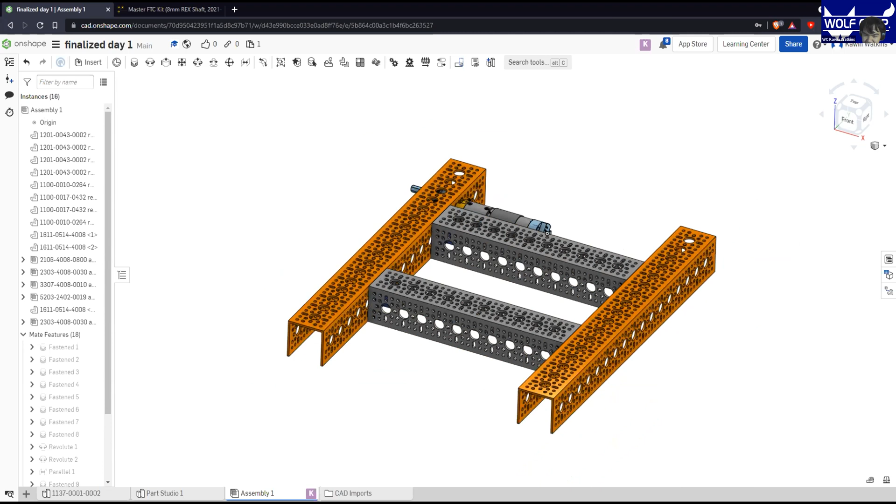All right, so now if you go to your document, or if you copy it over from here, you should see a chassis with one motor installed on it. And if you rotate your view, you should be able to see that it has pretty much all of the gears installed on it. And if you try to rotate one of them, it'll just rotate that one, and the other one will not rotate.

So the first thing we're going to do today is fix that. Just as before, if you go to your left, there's going to be a menu where you'll see every part that you have in your assembly, as well as every mate feature that you have. First, in the menu on top where you usually get your mates from, go to the very right of those mates, and you should see a menu with a lot of gear symbols. Select the one on the left, and if you hover over it, it should say gear relation. The icon looks like two gears meshing into each other.

Click on that, and then instead of selecting parts like you would normally do with mates, you want to actually select the mates themselves. Specifically, you want to select Revolute mates, which is why we did our Revolute mates. And for copying the file, let me see if—

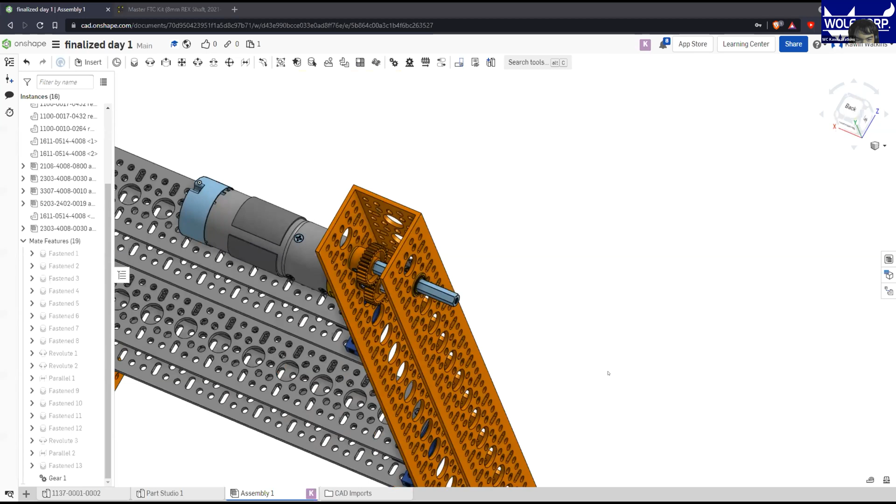Then after that, if you click and drag, they should mesh with each other. After that, all you have to do is click on the check mark, and your gears should be meshed and rotate quite well. So once you have your gear mate selected, then you want to go to Insert.

And then go to your Assemblies tab and select the second part, which is a large blue part that begins with 1310. Make sure it's 1310 and not like 1309, because it's kind of easy to confuse them.

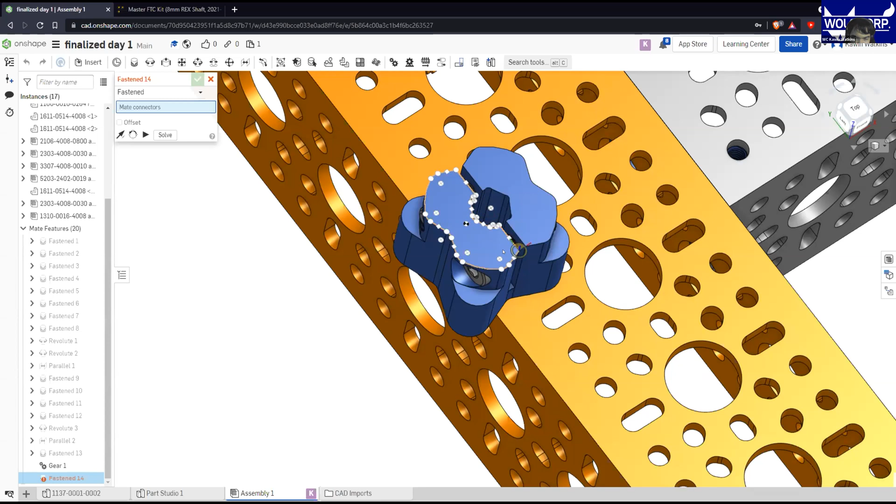So after you have that, check mark, and now you want to do a Fastened Mate. For that, you want to hover your mouse—first zoom in to your part, then hover over the top surface of this. It should be the one that's kind of thinner, and it only has one hole in it. If you hover over one of the surfaces, you should see there are a lot of mate connectors, but one is different from the others, and that's the one located in the center of the hole. Move your mouse until the icon shown is actually over that hole, and then click it.

For your second connector on the mate, just click the top of your bearing. On your bearing, there should be a lot of circles. Just select the one that's a bit on the edge, pretty much on the top of the bearing. Once you have that, if you notice it's not fitting correctly around the axle, you can just rotate it, but regardless, you can check mark that. Now if it's the wrong way, again you can just use your flip tool, and that should be all good.

And now when you click and drag on your hub, you should see that it actually rotates the axle and the gears and the motor and pretty much everything that goes along with it.

Then you want to insert, and...

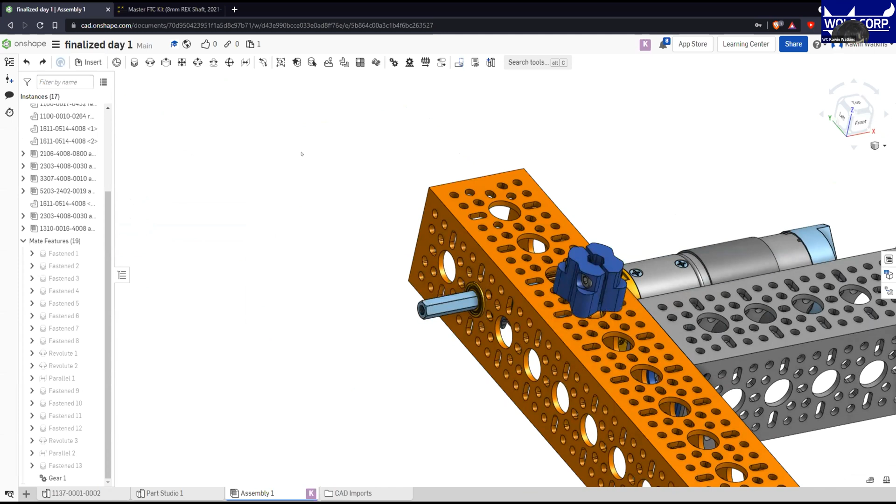So first, once you have your Fastened Mate created, on the top surface of this hub, the blue part, which the top side should have only one hole in it, hover your mouse over the very top surface of that and move it so that the icon, which is the yellow circle with the 3 colored lines sticking out of it, is over the hole that's in the middle of the hub.

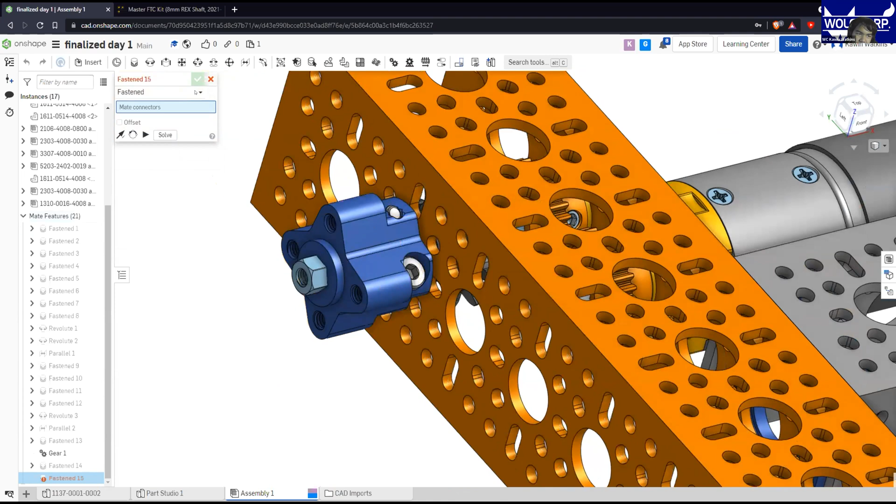Then just click on that, and then for your second connector, just click on the top of the bearing, the top being the side that's facing towards the outside. And then you can rotate that if you want and solve it. Close this if there's still a window, and click and drag to see that everything rotates correctly.

And now after that, we are going to insert another part. You're going to have to do a bit of scrolling down for this, but it's going to be the large wheel that ends in 0096. And there should be actually 2 of them.

One is going to be blue and one is going to be gray. It should be below the sprockets. So just select the gray one, just because like blue wheels would look kind of weird. And then hit the check mark again.

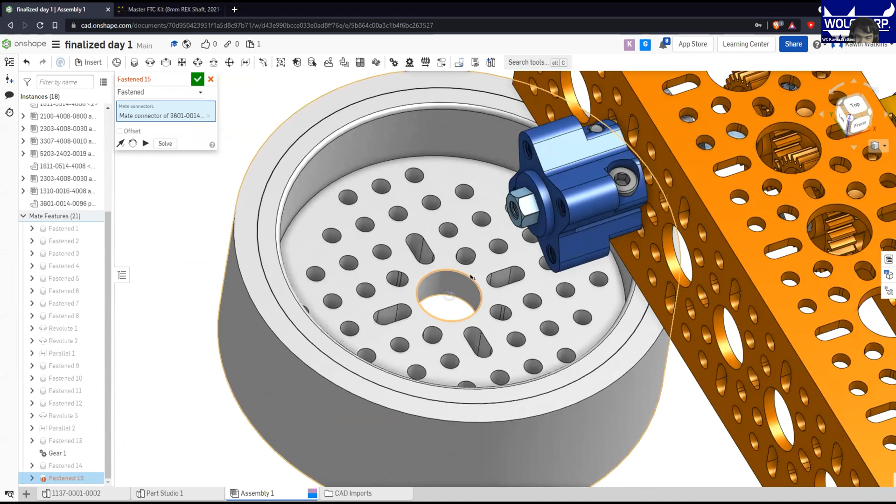So now what you're going to want to do is do a Fastened Mate and go to the top of the wheel, specifically this like kind of surface with all the holes in it. You want to select the large one in the middle and select the top edge of that, and then click. And then for your hub, where you attach it to, first you might want to rotate your view so you don't accidentally click the wheel.

For this, you want to actually see that there's kind of 2 sections that would count as this surface. There's like the flat surface with the 4 holes, and there's also this little part that sticks out. So what you want to do is select the edge where they both meet, which would be kind of like the bottom of the part that sticks out, basically.

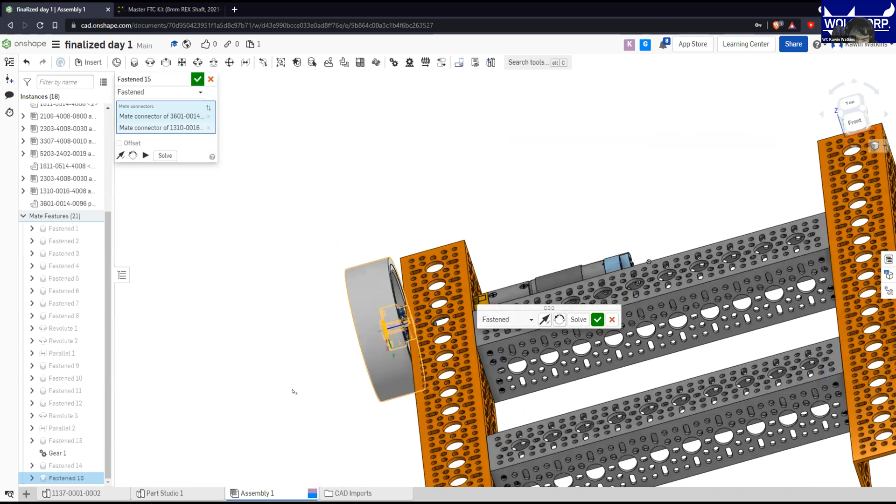And then once you have that, just click and your wheel should be all good. Once you have that, you can click and drag on it to rotate it.

Another thing that we can do is called animate, where we can basically have it so that we can move our wheels around. So to do that, go to our menu on the left, and it has pretty much all of the mates in there. Just click on Revolute 1. Don't double click, just click it so that it highlights in blue. Then right click on it, and then you'll see that there's a lot of options you can do.

What you want to do is go close to the bottom, and there should be a button called Animate. Once you click on that, there's going to be a box that shows up, and the only thing that really matters are the two buttons on the bottom, which are play and stop. So if you press play, then everything should go in order. Your gears should rotate as well as your wheel.

And there's also some more options. Start value and end value are pretty self-explanatory. Steps just controls the speed, and playback type you can set it to like loop or play only once.

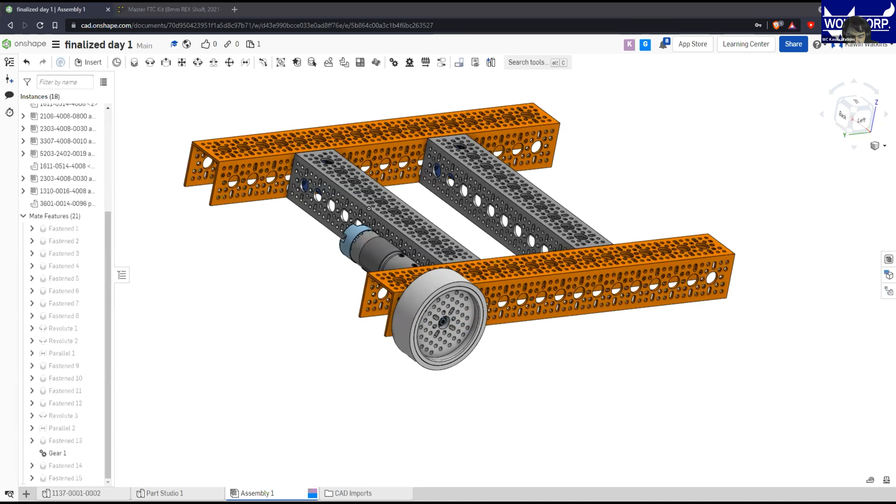All right, so to attach the blue thing, I assume you mean the hub.

Basically what you want to do is do a Fastened Mate. So if you don't remember from yesterday, that's on the top menu, and it looks like a cylinder with like two parts that are coming together. If you hover over it, it should say fastened.

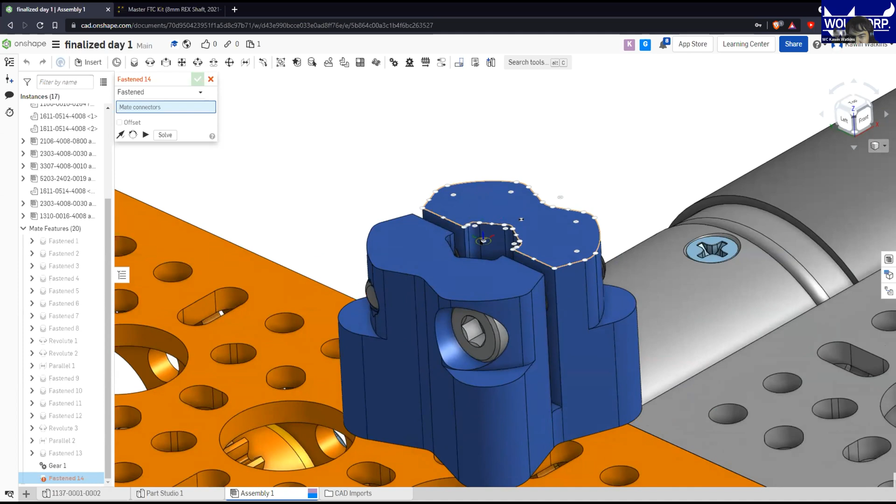So once you get that, you will hover on the top surface of the hub, and there should be a lot of like white dots, which are basically the points where you can connect it. But the one that you want to click on is going to be located on the top of the hole that's in there. So it should be the one that's like on the far side of that surface.

And then once you have that, the second connector that you want is going to be on top of the bearing. Basically, what you want to do is just hover over the surface of the bearing and click.

And if you want the hex to line up, even though it doesn't really matter, just click this circle key if you want to. And then just press the check mark. Once you have that, it should be attached on. Is that good?

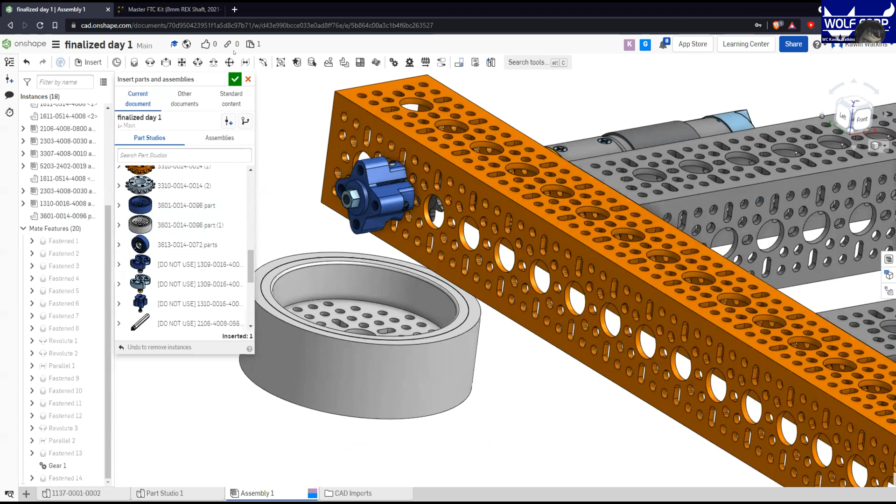And then a quick recap for insert: just go to Part Studios, scroll down, there should be 2 large wheels, one blue, one gray, and just move the gray one into your assembly. Then check mark, do another fastened, and make it, attach it to the hole in the center, and attach it onto the hub where the part that sticks out meets the surface that has the holes on it. Once you have that, you can press the check mark and your wheel should be ready.

So if anyone else has questions, then don't hesitate to send a message and I can go over it.

Done? I'll wait like 1 more minute and then I'll hand it off to you. All right, no problem.

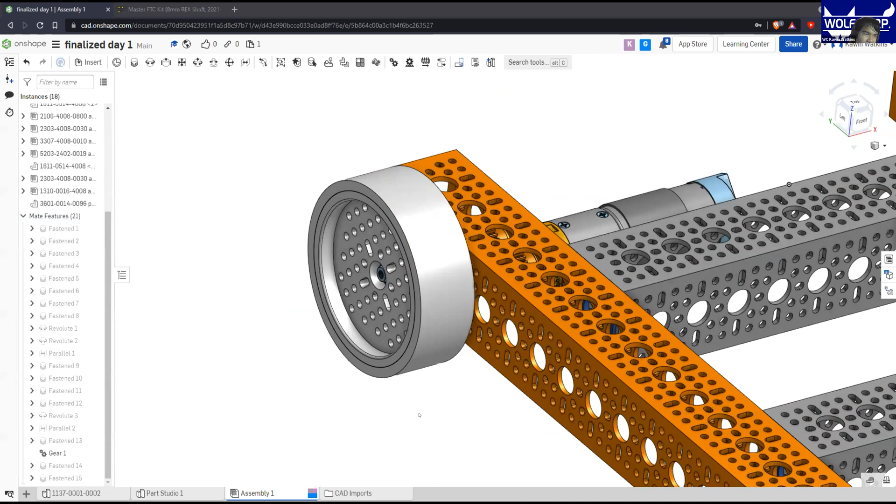My chassis is fastened to the origin, but if you click and drag and it's moving a lot, one thing you can do is right click on a part, and in this menu there should be a button called Fix, and that makes it so your part isn't able to move at all.

But it doesn't really matter where the origin is, just that your chassis is pretty much fixed. Actually, this is additional information, but mates, you can also set mates to be on the origin. It's kind of hard to do here because it's already attached, but you can basically use the origin for mates as well.

So if we don't have any more questions, then I will hand it off to Kevin, who will show you how to make the middle wheel.

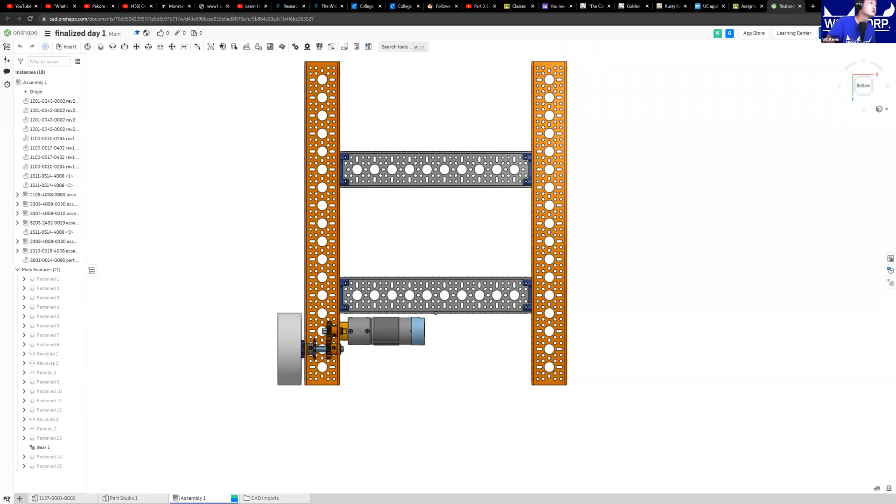Okay, so here is where we left off from Kawin, right? We have our bottom left wheel here attached to our motor, and it spins it correctly and everything. Next up, we're gonna make the second wheel that's right around the middle of the robot.

First off, I think we want to insert two more bearings for us to revolute. So go down into your part studio, and then the bearing should be 1611-0514-4008. We're gonna grab 2 of those. And don't forget to press check mark afterwards so you save them in.

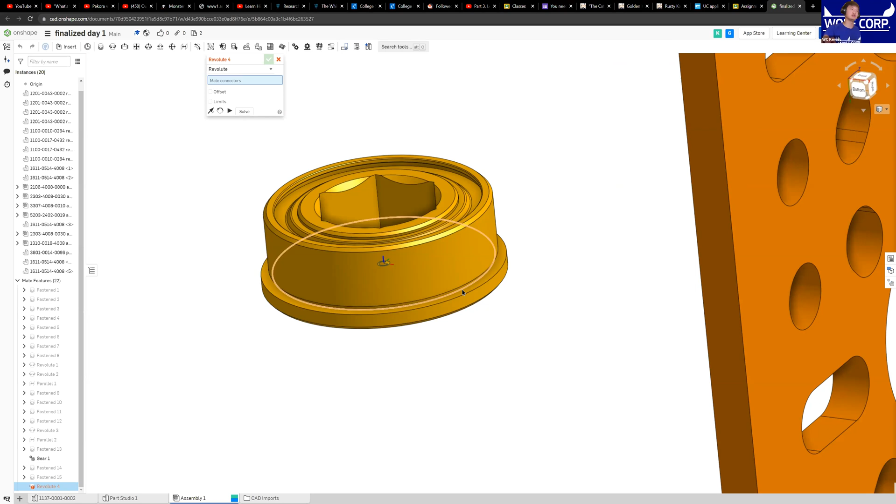Now we're going to use our revolute mates again so we can spin them in our channels. For our first bearing, we're going to click on the underside of the protrusion on top. So click on there.

The hole we are going to use is 2 up, so the third one from the channel here, this one. I'm going to zoom in and click on the inside of the channel here. We want the head of the bearing to be on the inside of the channel, so flip that. Then press check mark. Your bearing's head, the part that's thicker than the rest, should be on the inside of the channel, like that. It's counting 2 holes up, and then it's on the third hole there.

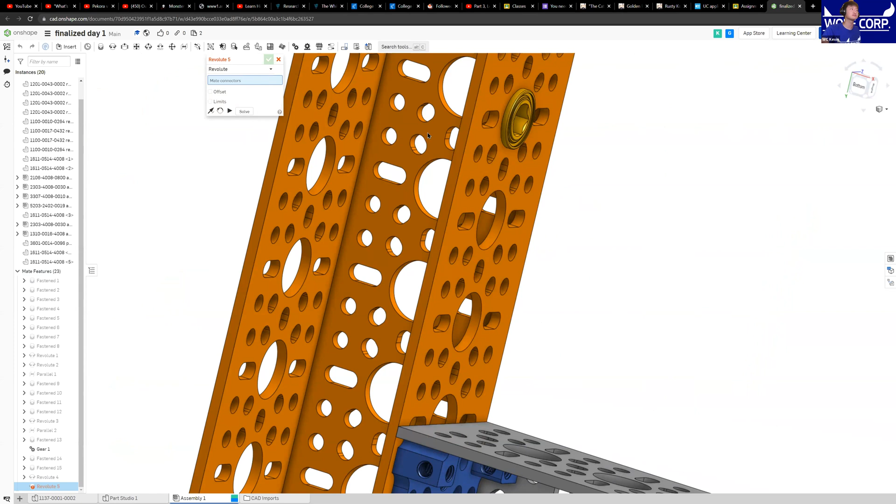Moving on, we're gonna do the same thing for our other bearing, just on the other side of the channel. Click on that underside edge of the bearing, then go around and click on the inside of the hole of the channel. Make sure that your head is on the inside. And then there you go - that's what our two bearings should look like.

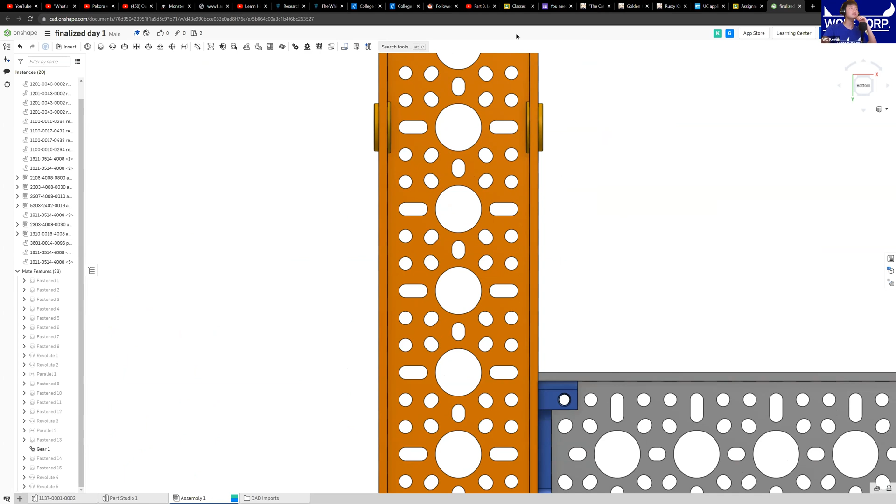Any questions so far? All right, we'll give it another minute for people to finish attaching those two.

There's going to be some slight differences, especially in the types of stuff that's on the axle. So it's mostly the same concepts, just kind of different parts.

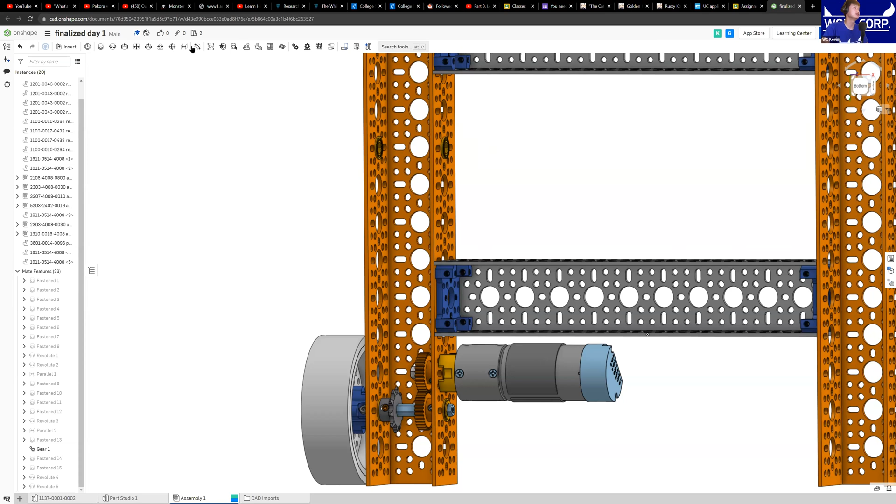All right, I'm going to move on now. Next step, we're going to line these two revolute mates up so that they spin together with a parallel mate. At the top of the toolbar, in the first section where all your mates are, it's the farthest to the right, and this is the parallel mate. It's like two rectangles with an arrow pointing at both of them. If you hover over it, it says parallel mate. So I'm going to click on that.

Then we're going to zoom in on one of the bearings and click on one of the surface areas, like the hexagonal shape on the inside of the bearing. Just any one of these surface areas. And then click on that.

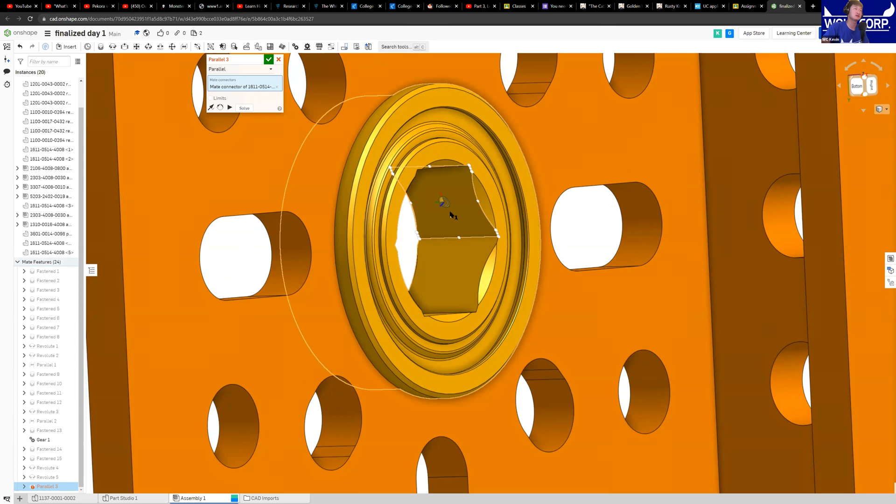And then go to the other bearing and just click on another surface area as well. Once that happens, once that happens, when you press the check mark, the two should just kind of spin together.

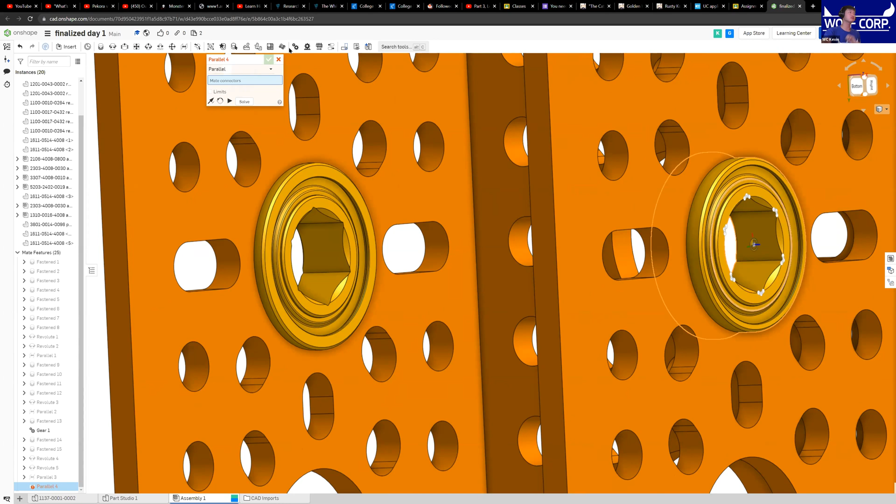Any questions on this one? Okay, if there's no questions, let's just move on then.

Next up, we're going to be inserting the actual axle now. So go back to your insert menu, and then it's going to be an assembly here. I believe it's this one, the bluish axle, ending in 0800. So this blue axle right here.

Just going to put one in there and then check mark. Okay, and then for this one, we're going to use a Fasten Mate to stick it onto one of our bearings here.

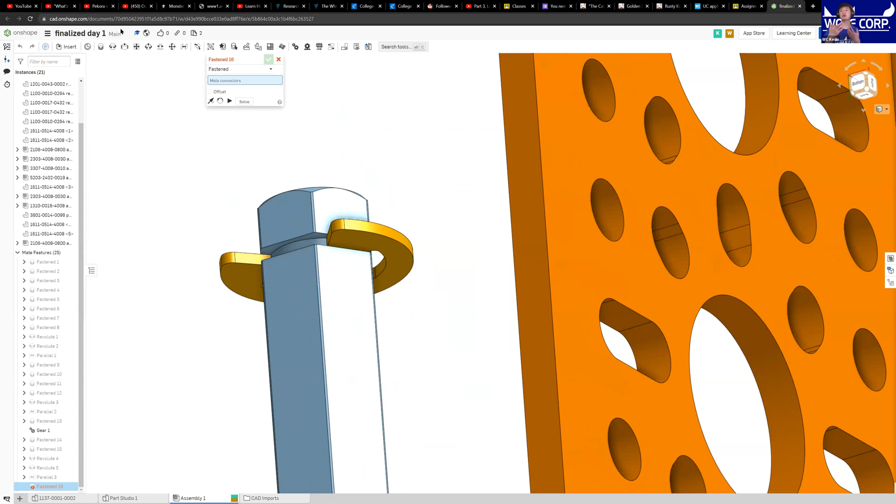So the important thing here is to make sure that the center indicator is well centered on your axle, so that the program knows how to spin it correctly and in center. To do this, I'm just going to click on the underside of this yellow thing at the top, and then click on the edge. So it's going to be this edge on the underside of the axle. And just make sure that your center is centered.

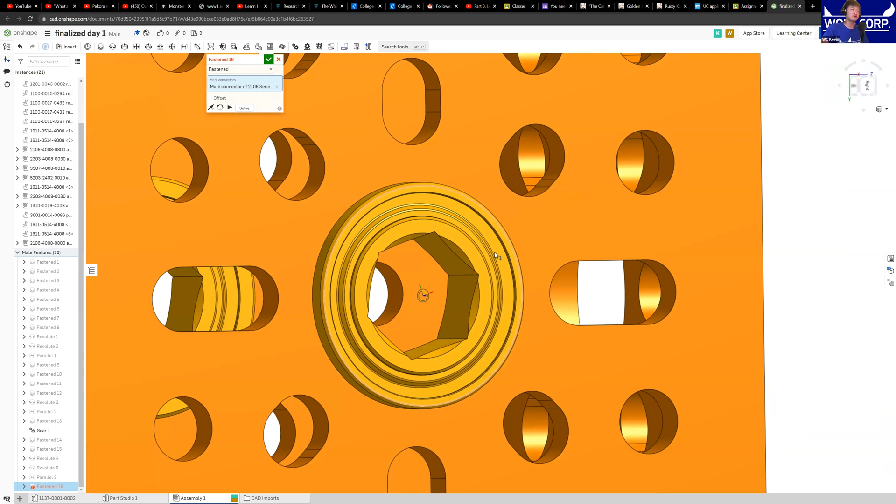And now I'm going to go back to this bearing, the bearing on the inside of the robot. And then I'm just going to click on one of these circles, the outer edge of the bearing-ish, and just make sure that your center is centered again. And then make sure that your axle is pointing outwards, right?

Kaboom. There you go. And then if you try to spin it, they should all just kind of spin together. Your two bearings and your axles should spin together. Questions so far? Okay, I guess no one has a question up till this point, so we can just keep going.

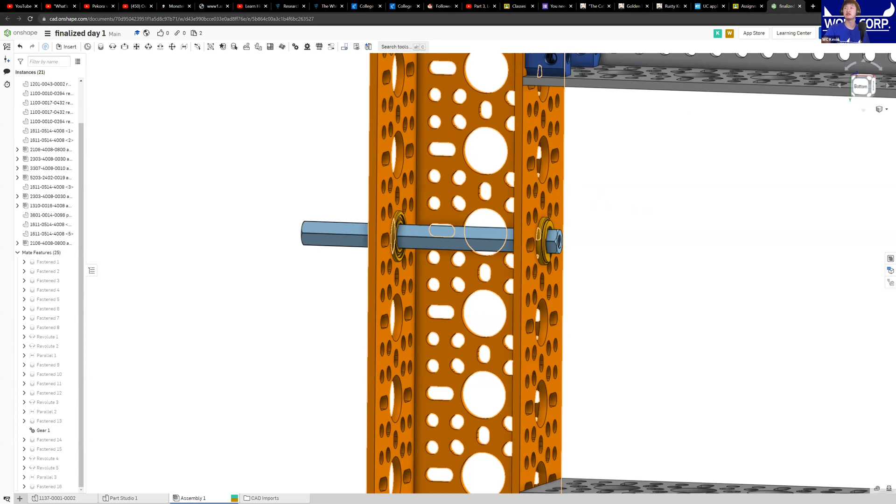We're making good progress. Next up, we're going to start inserting all of the gears and sprockets on the inside of this channel and on this axle. So first off, we're going to insert a big sprocket here. The part number should be 3310-0014, and 0014.

I didn't center it. So do you want me to show you it again, or? Okay. So for the Fasten Mate, right? For the axle. So, okay.

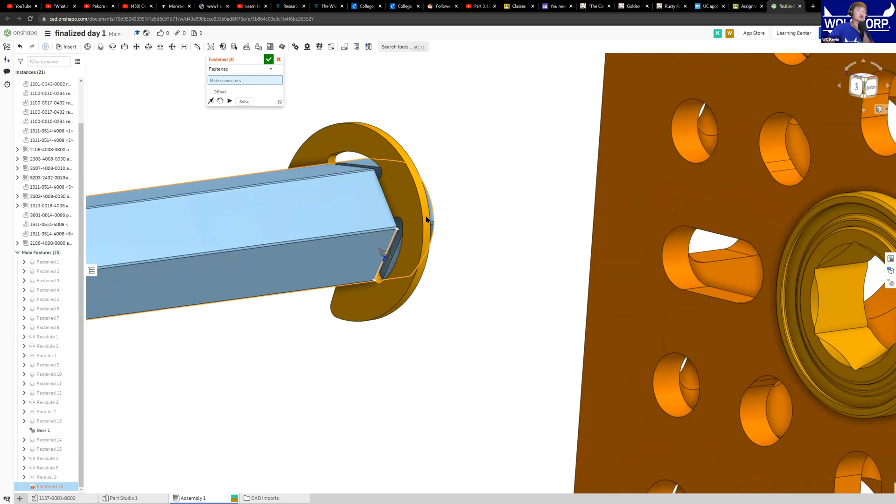Click on your Fasten Mate, and then on the underside, so the surface area of this yellow part that's pointing with the longer side of this axle, right? Going to zoom in on the underside of this, and then click on the edge of this. Just click on the edge. Don't click on the surface area, but click on the edge.

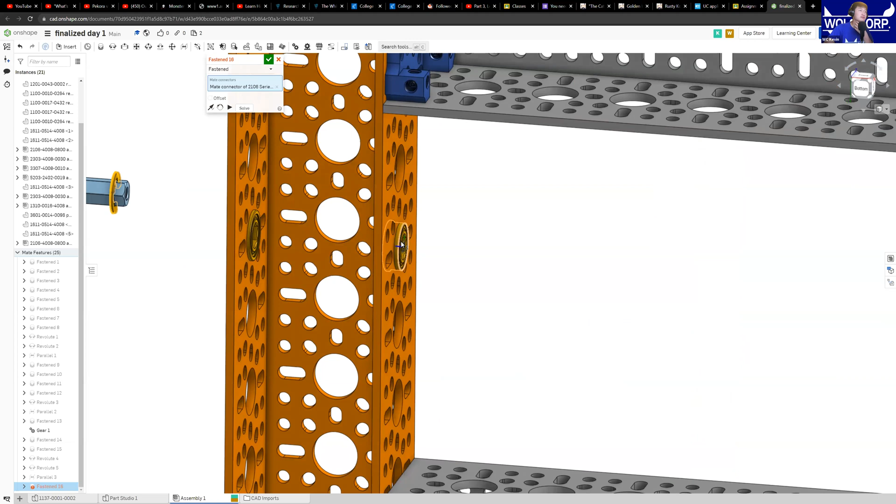And then once you've clicked on the edge, go around to the bearing on the inside of the robot. So this one right here. Then zoom in a little and just click. You can really click on any of the circles, but I think the outside one is the safest. So as long as your center indicator here points to the center of this bearing, then it should be good.

And then you can just make sure that at this step, the long side of your axle is pointing outwards. And then once you have that, just check mark. Okay, I hope that answered your question.

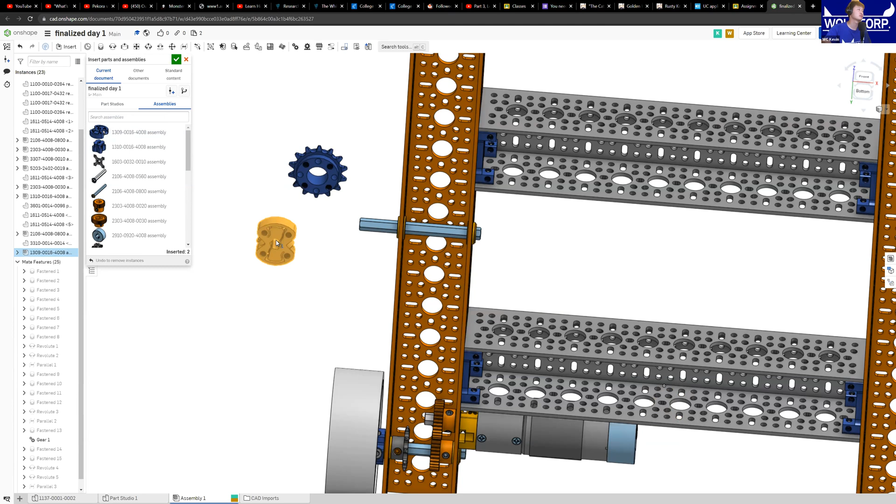But okay, once again, we're going to go back into our insert menu, and then we're going to click on this big sprocket. It's blue, the part number is 3310-0014 and 0014. We're going to get one of those, and then we're going to go into assemblies now. First one, we're going to just the one at the top, it should be a hub, a blue hub, and its part number should end in 4008. There you go.

And then as for the final piece we're going to insert right now, it's another sprocket. This time it's gray, and the part number should end in 0010. Right there. Questions on which ones to import?

So the first part I imported here is the blue one in Part Studio. The first one is in Part Studios, which is the big sprocket, and it's 3310 0014 0014.

And then as for the other two, they're both in assembly. The first one should be at the very top, it's a hub, and it is 1309 0016 4008. And then for the smaller sprocket here, it's 3307 4008 0010.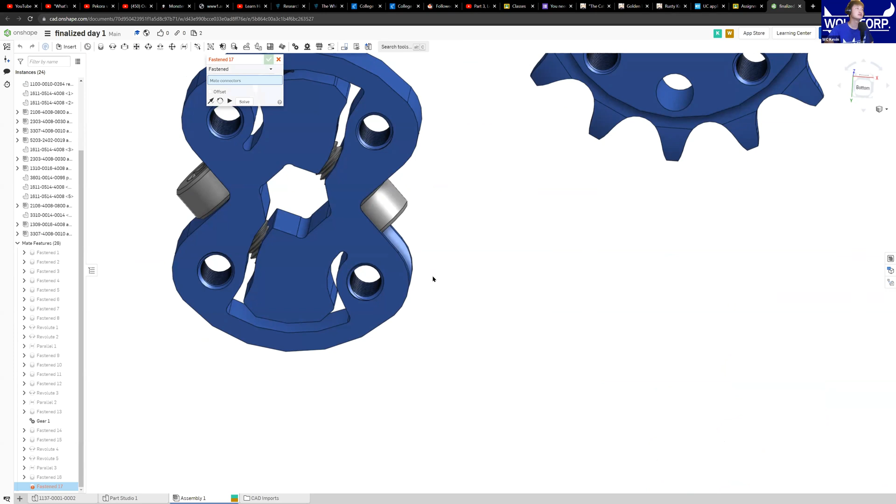Okay, so first off, let's put our hub on. We're going to use a Fasten Mate for this. So we're going to select the surface area. For the hub here, there's two sides - one has an extrusion on one side, and the other one does not. We're gonna put the flat side onto our bearing, on the inside of our bearing over here. So use a Fasten Mate, click on the surface area, making sure that your center indicator is in the center hole of this.

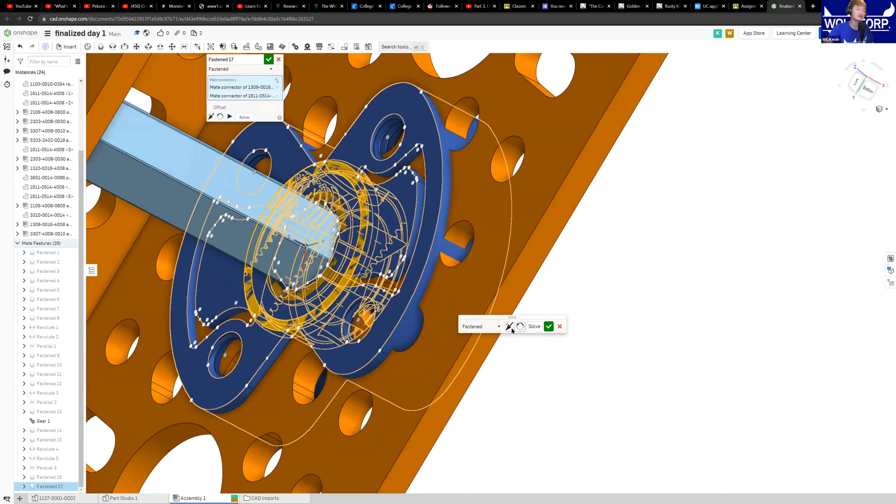Once you have that, you can go over to your inside bearing here, and then click on your circle again, making sure once again your center is centered, because when it spins and they're not centered, it's not going to be fun. Just kind of flip it if you have to and make sure that it is aligned like that.

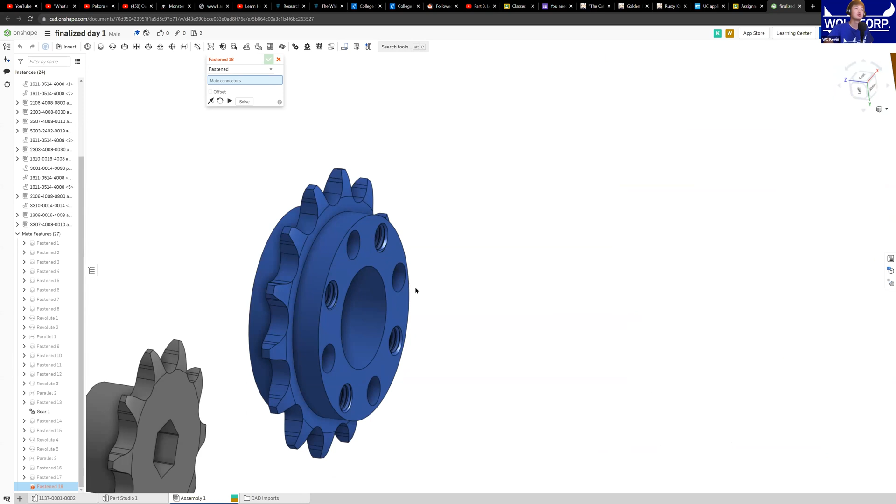Okay, once you're done with the hub there, let's put on the bigger sprocket now. We're going to use a Fasten Mate still, and then click on the big hole in the center of this hub of this sprocket, click on the edge there, and then go over and try to click on the bottom of this extrusion. Just make sure that your center is centered there, and then flip if necessary, and check mark.

Any questions so far?

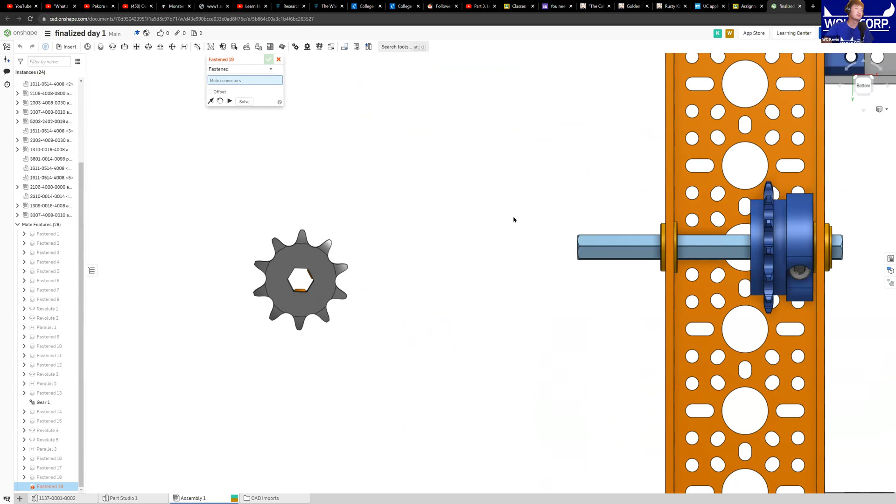Okay, so you didn't see the sprocket, the big one? The big one should be in Part Studio. If you scroll down a little, okay, you found it. That's good.

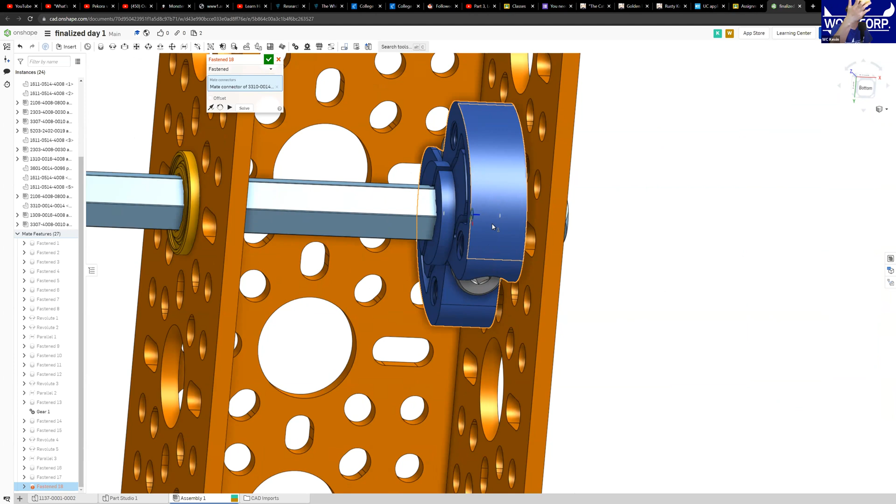You didn't see me attaching it, okay, I can do that again real quick. Right, this is your sprocket here, and we're gonna click on the big hole edge. And you also have the hub in the wrong place. So the first thing you can do here is, even if you don't have your hub attached, you can still just attach your hub and your sprocket together first.

Right, I have the edge here, and then I'm gonna click on the bottom of this extrusion here. And then those two should just line up nicely.

As for attaching the hub onto the bearing, we're gonna use a Fasten Mate again. Okay, you have the hub - if you have the hub, then I'll just speed through this.

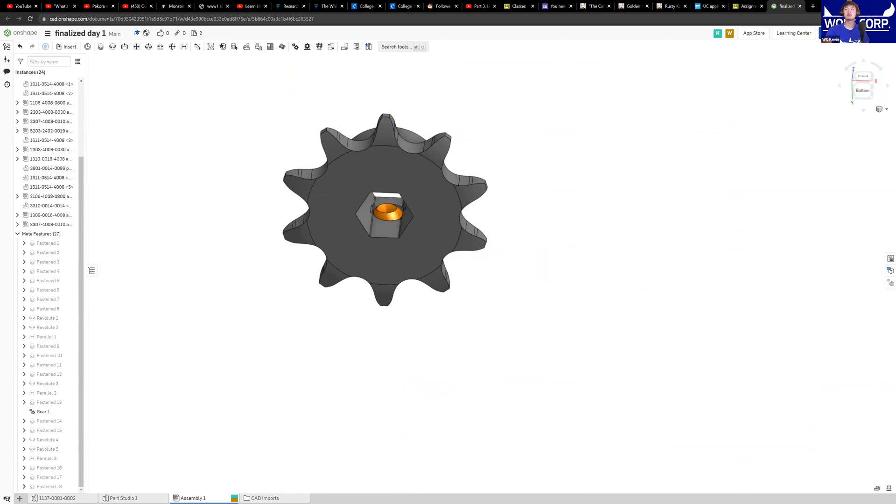Okay, final piece, the small sprocket. We're gonna attach that - attach the top of this extrusion to the bearing on the left side. So Fasten Mate, and then surface area, or you can also do the edge, but surface area or edge - just make sure your center is centered. That's the most important part of that.

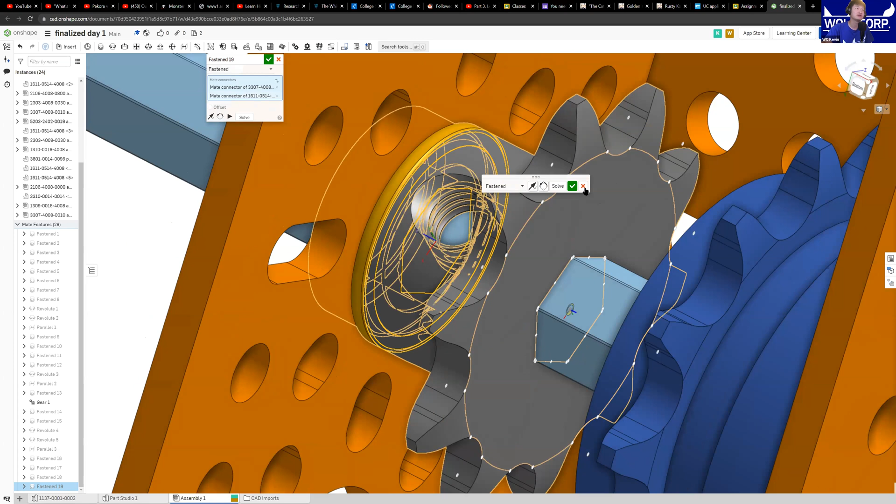Then we're gonna go over to this bearing, the opposite bearing now, and click on the bearing, just make sure center is centered, and there you go. So the final inside of this should look like this. That's basically it for that.

And then once we're done with these, we can attach the wheel and its hub.

So for the wheel, we're gonna go into insert, and then it's in part assemblies here, or part studio sorry. Go down and click on the gray wheel, should end in 0096. Kaboom.

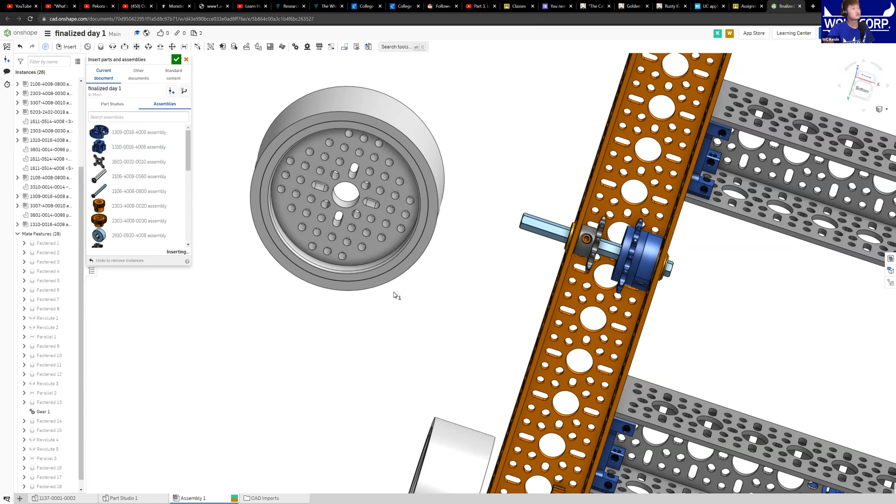I believe this one is in assemblies, and then at the top of your assemblies list, click on the thicker looking hub, the second one from the top. The only difference between this one and the other one is the beginning is 1310. So it's there. Check mark when you have those two.

Everyone have the two pieces here?

Okay, so if everyone's ready, we're gonna go ahead and stick this side of the bearing, or of the hub - so the smallerish side of the hub - and we're gonna use a Fasten Mate to stick that on the outside of the channels.

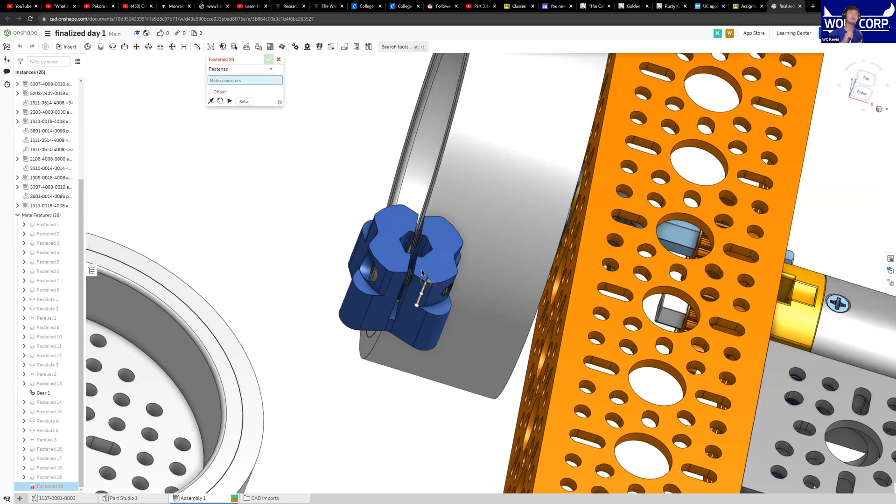So take a Fasten Mate and then hover over the surface area, making sure you're clicking on the center so that it's centered. Then you can go over to the outside of the channel, right over here. Just click on the bearing so that you're centered, and then check mark that.

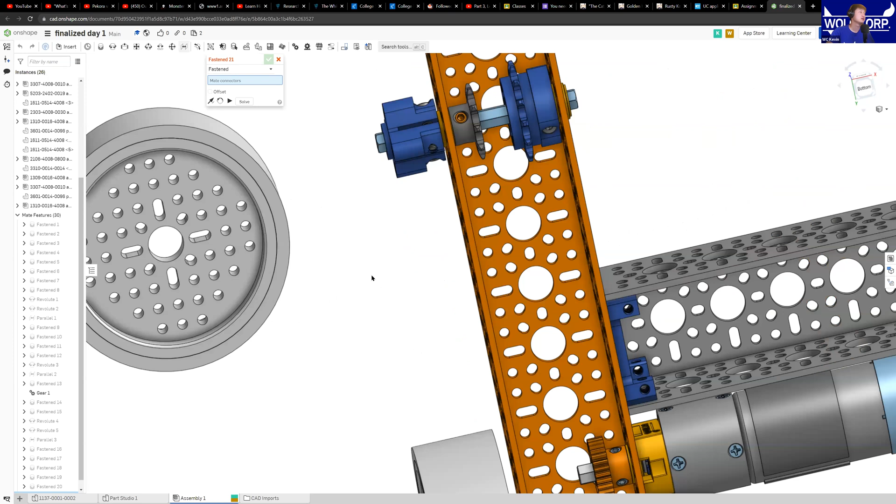Now we're going to attach the wheel to our hub. For the wheel, there's a bit of a difference between both sides - one side is a bit shallow, the other side is a bit deeper. I think we're going to stick the deeper side into the hub. You're going to have to kind of estimate it, I guess.

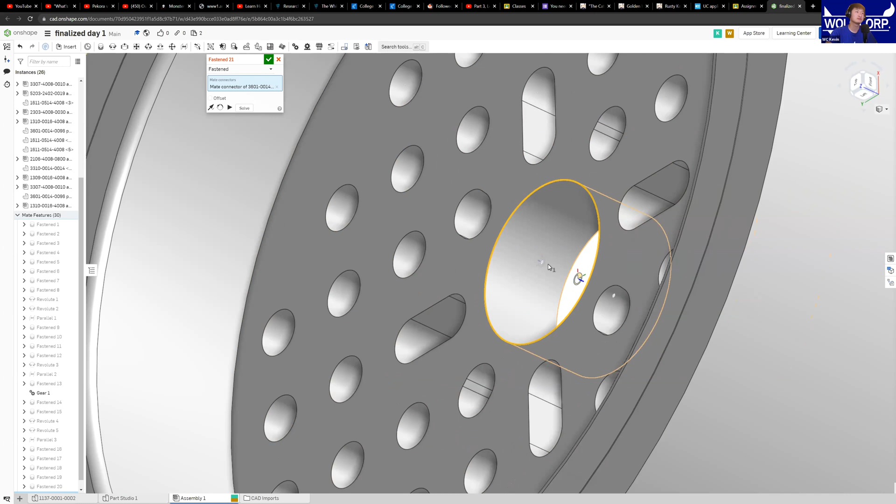I'm going to click on the big centerpiece of the wheel, the edge of that. Then I'm going to go over to my hub and click on the bottom of the extrusion, so that the wheel will fit nice and tight up against the hub.

Oops, did something wrong. Something happened.

And there you go, your middle wheel should be finished by this point. It is finished by now. Questions before we move on? We can take like 5 minutes to make sure everyone has the middle wheel done here.

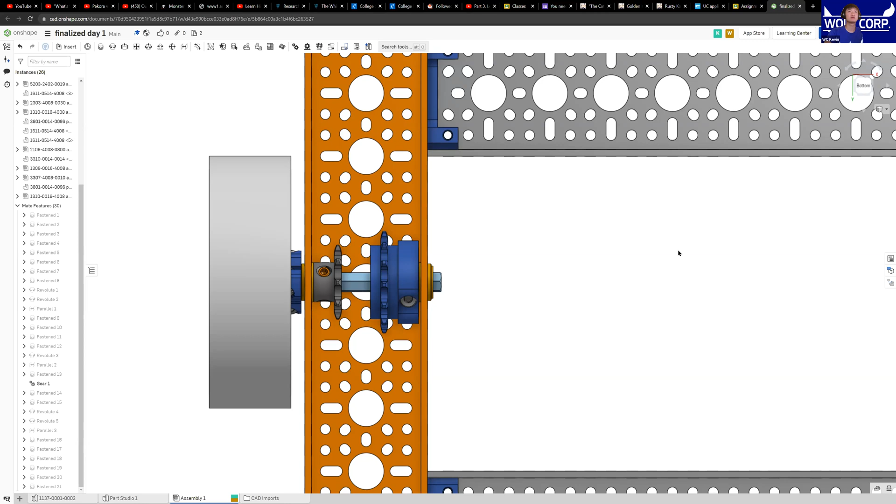Why can't the motor be attached to the wheel directly? Which motor, are you talking about this motor, or the wheel axle? You could, I mean that's one way. There's many ways of doing this.

In the kit that we are currently using, it comes with chains inside of it, so you're supposed to use chains in order to connect this. Sorry, he corrected his question.

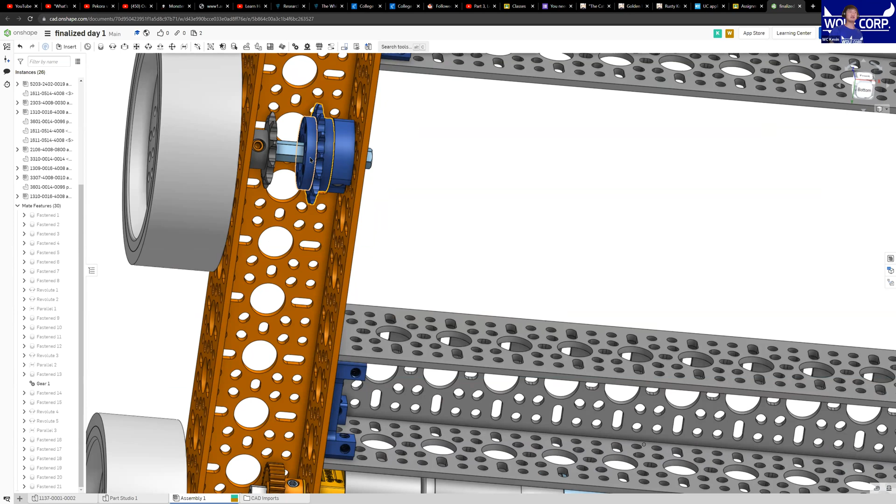Why can't the motor, or not the motor, the wheel be attached to the axle directly, I think. Is that what you're asking? Why can't the motor be attached to the wheel axle? So this to this.

Or are you talking about putting the wheel onto the motor axle here? More or less. Well, obviously you can see that this motor axle is a little short, but with gear configurations, you can adjust your speed with different gear sizes if you want to do that.

And with this particular kit, we're going to be using chains to help move the rest of the wheels along with it.

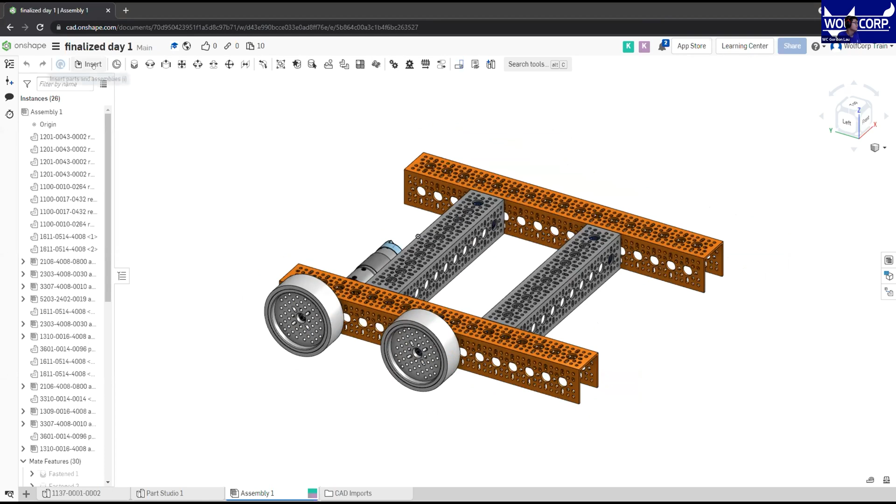So in order to do our last wheel, which if you saw in the master kit, it is an Omni wheel - it's easier to make the robot turn. So we're going to go ahead and insert our pieces in.

We're going to do the same thing again. We're going to insert 2 bearings. Go ahead and insert 2 bearings. Then we're going to enter our axle.

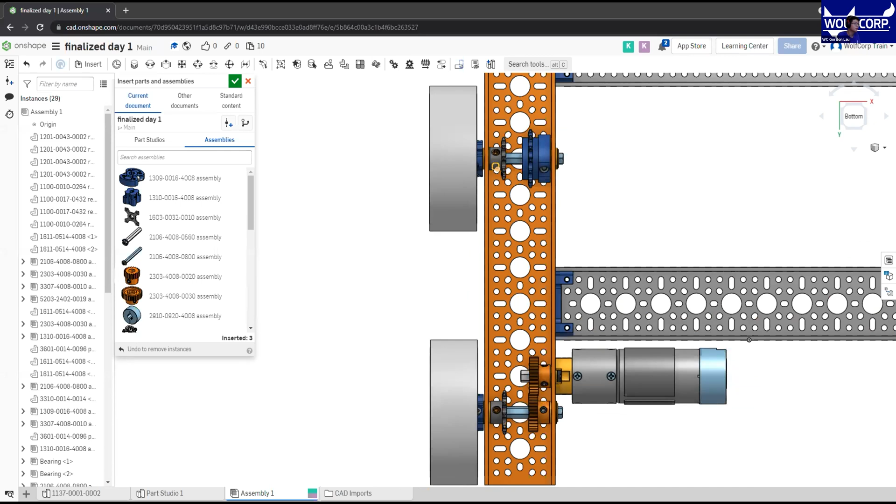And then we are going to put our big sprocket to align with our chain drive, since currently how the gear configuration is, it goes to the small one, or its chain is attached like this. So we're going to put in the big sprocket and a sonic hub onto it. I'm going to go ahead and import our sonic hub and then our big sprocket.

And then we're going to go ahead and insert our wheels. We can insert our wheels later, but let's just get these parts attached first. So what we're going to do is we are going to go ahead and attach our bearings first.

This should be no different from the previous steps. Go ahead and find the center point of your bearings, and then attach it to the second hole in the front of your chassis. That's going to be right here for us. So it looks like this when you have it attached.

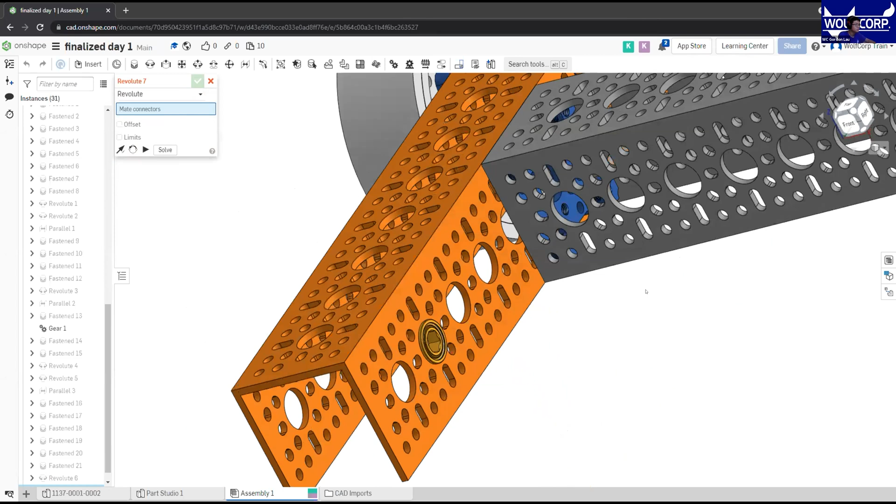Then we're going to go ahead and do it with our second piece. So we're going to click on the outside of the ring and attach it to another revolute. And now we can see that it is actually in a wrong orientation, so we're going to click on our flip button and it will flip it over to the correct orientation.

Oh whoops, I put it on the wrong hole. Thankfully, we can easily fix that with Onshape, because Onshape has a really nice editing aspect to it.

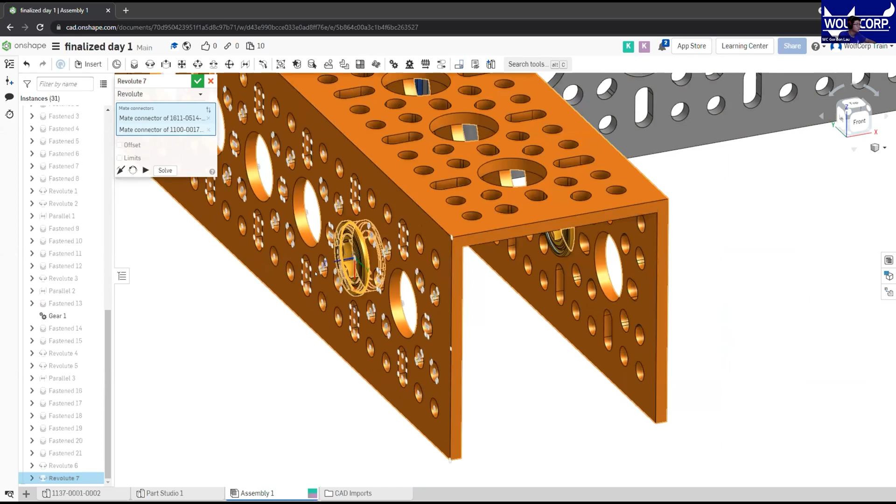So now our 2 bearings should be aligned with each other on the second hole. Next, we're going to do a parallel mate, and what this does is it basically makes sure that both sides of our bearings are aligned with each other.

Wait, is it a parallel? Wait a minute. Basically make sure that both sides of our axle should be basically even with each other. And also, so that the bearings move at the same time, yeah, like Cohen said.

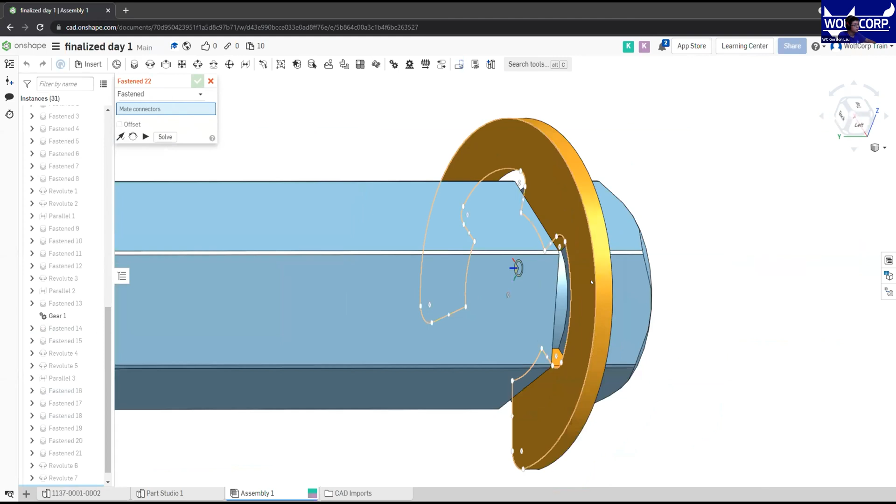All right, then let's go move on to our axle. And then we're going to add a Fasten Mate and fasten that to our actual bearing. My click's not registering.

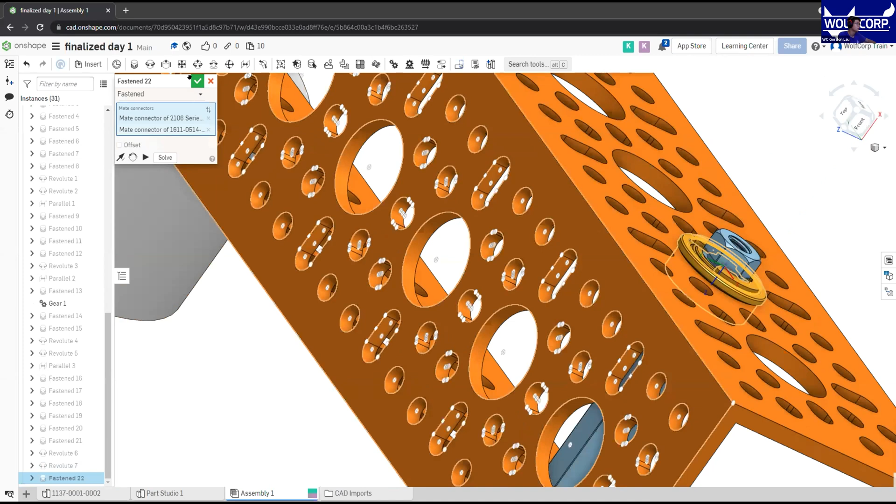So now we should be able to spin our gear around. Next, we're going to add our sonic hubs to our bearing, so we'll go ahead and fasten that mate.

Oh, I'm not there yet. Sorry about that.

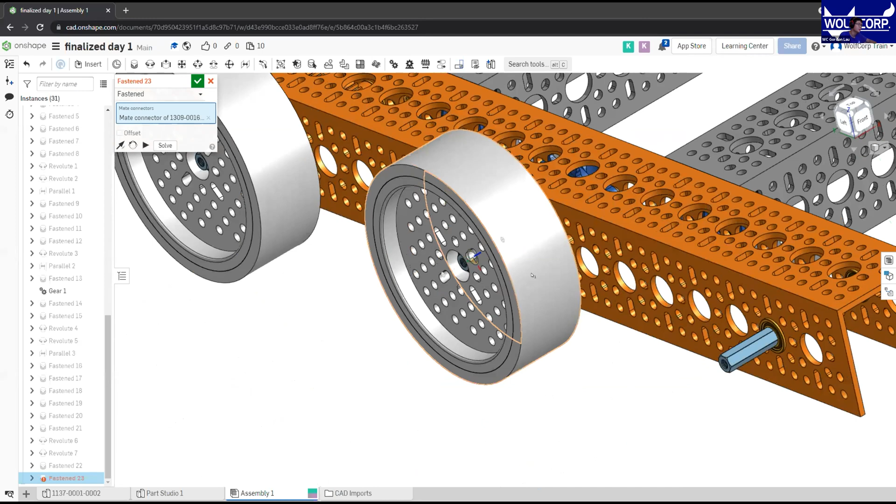So all pretty much we're just copying and pasting the steps we learned from the last two wheels. We're not doing anything new. We just added the two bearings and the axle, and that is pretty much all we did.

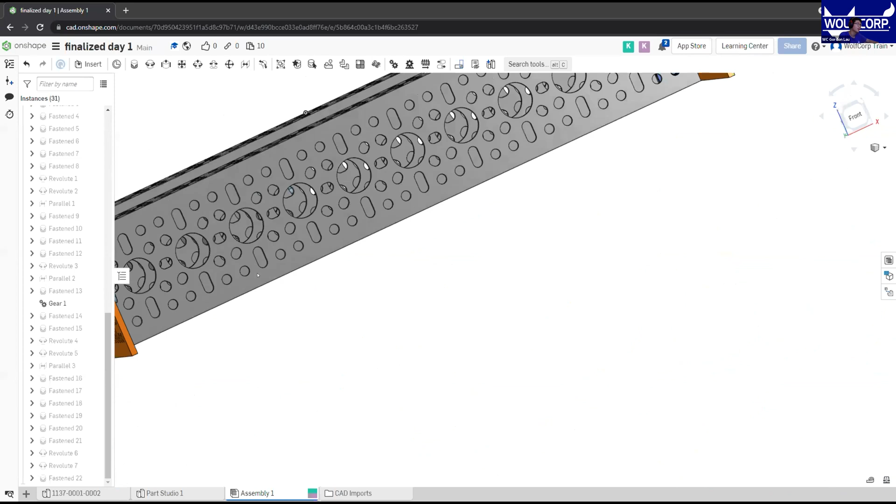But let's first finish our sprocket, our sprocket order, so we can make sure that these gears can work theoretically.

So first we're going to get to our Fastened Mate and fasten this to our bearing, so when we rotate our bearing, the rest of the axle and everything else on it will actually be moving with the bearing. Go ahead and click on your bearing on the face.

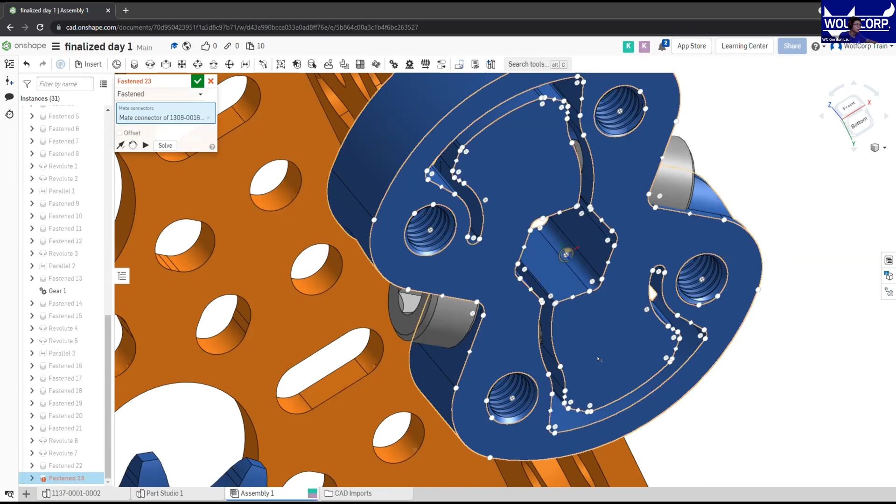When selecting the face of this sonic hub, you should highlight over the greater area, and you'll see the yellow circle pop up, which tells you which point it is fastening to. We're not going to fasten to one of the small points, or it will be misaligned. We'll simply hover over the center and click on it, and that will be our center point.

We're going to fasten the side with no connector, basically the blank side, to our bearing like this, and press OK. Then we should have almost something that looks like our middle wheel, or middle axle.

We're going to finish that up by adding our sprocket to our sonic hub, finishing up our step. Press OK, and now this should be what it looks like.

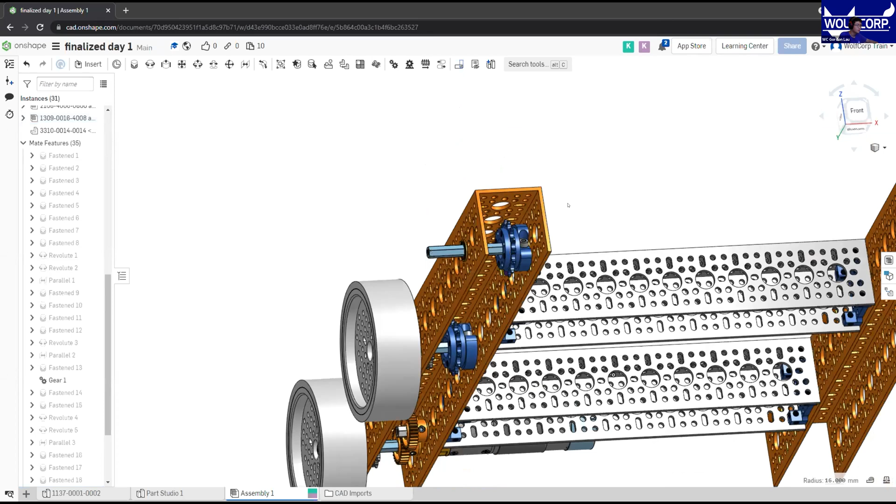So it should look like an axle with two bearings with a sprocket hub installed, and when we spin the sprocket hub, it should rotate with everything.

You can also go to this revolute and click on animate, and we can press play, and then we should see a small animation that shows it rotating.

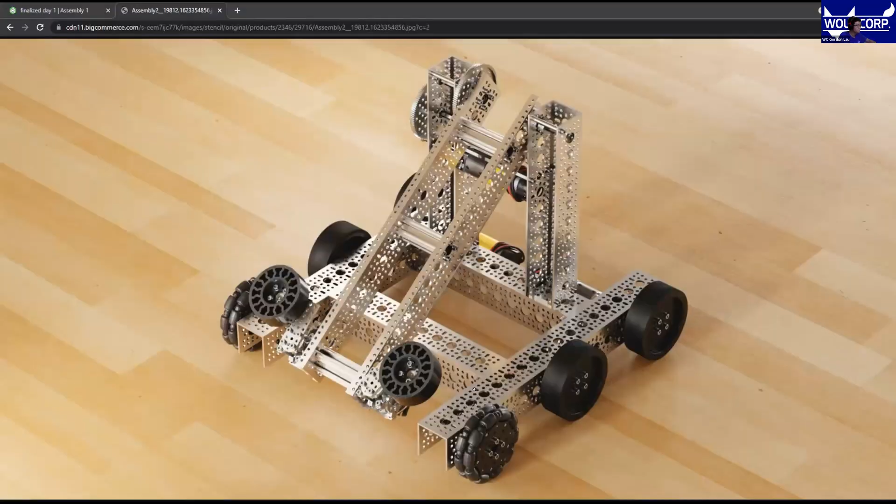Now, when we're going to do our wheels, we know from the master kit picture that the front wheels are actually a different wheel. Let me grab the picture really quickly. When we look at this robot, we know that our front wheels have this weird formation, like a cross pattern, and then it is connected.

So in order to complete this task, we are going to build our wheels slightly differently. Instead of a hyper hub, which is one of the big hubs over here, we're going to be using a sonic hub.

Then we're going to go ahead and import our two wheels, so one and then two. In order to put our wheels together, we need to put a spacer, or else the wheels are going to be basically touching each other, and like the point of the smaller wheels, we'd have no point. So we're going to put a small part, this yellow bracket, this yellow spacer.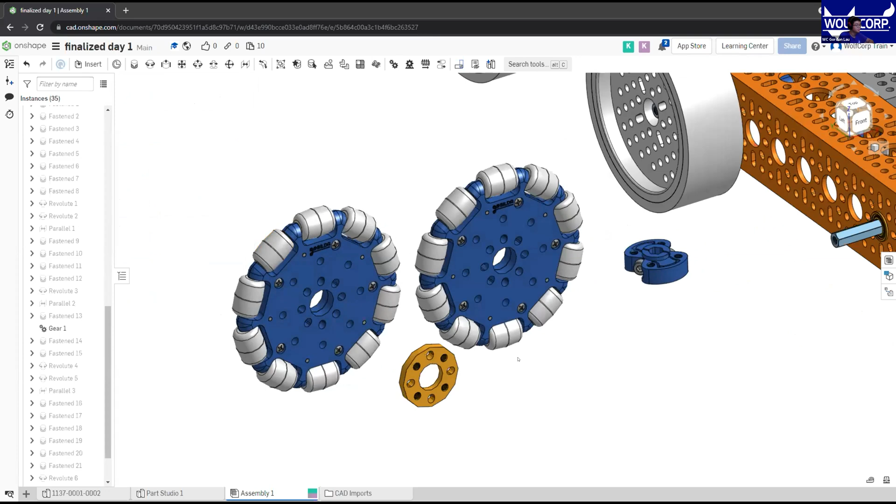So now when we attach our wheel, we are going to make a fasten, and then fasten it to our... if it would get the fasten for me. There you go. We're going to fasten it to our bearing. It's on the wrong side, so we're going to flip it.

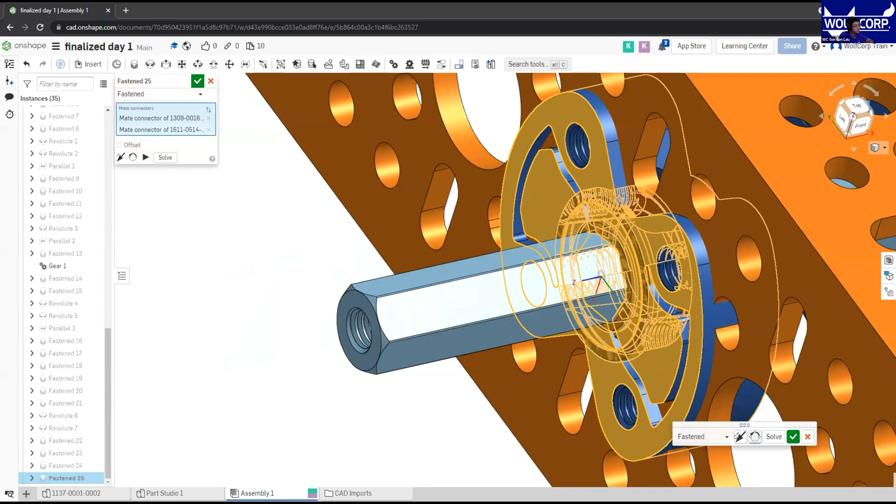Then we are going to put our wheel, fasten our wheel to our... uh-oh, why is it so slow? Going to get that fasten and fasten that to the sonic hub. I didn't think I clicked that one correctly, so I'm going to redo that really quickly.

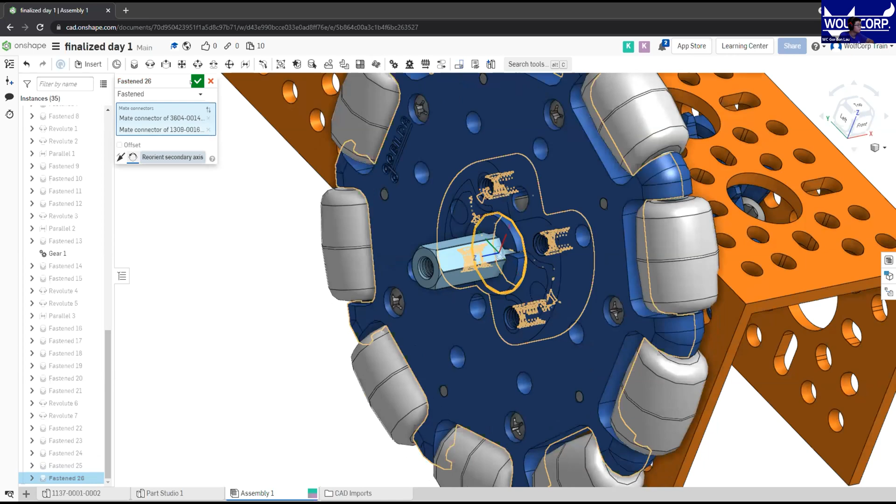Going to fasten our wheel to our center point of our hub. Excuse me, Onshape, there we go. Oh, that is inside the hub, so we're going to go ahead and flip that. Go. Then now, to top it off, we're going to add our spacer.

Add our spacer. And then that's inside our wheel, so we're going to flip it. And then we are going to finish it off with one more fasten. We're going to fasten it like this. Flip it because it is touching.

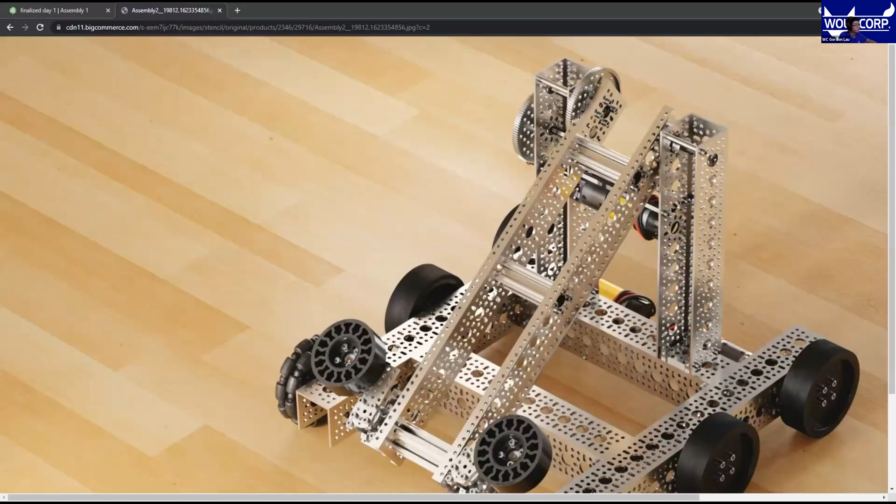Okay, so right now we should be done. Except these wheels are right next to each other, which is a problem because we wanted to have, if you checked out our picture, our wheel actually has this weird crisscross kind of pattern. And that does not look like this right now.

In order to solve that, we're going to go ahead and click on our fasten, click on offset, and then we're going to create a rotation offset on our XYZ plane. So we're going to say rotate about Z, and we're going to rotate this by 90 degrees. There we go, that's okay.

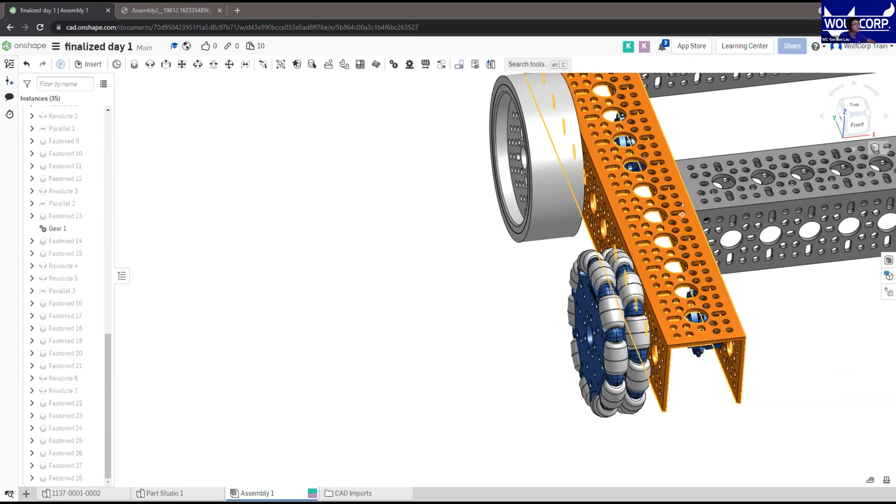Now we should have this crisscross pattern with our wheels, and then we should be done. Now, if anyone has missed a step that we can go over, message any one of us. But we should have at least one side done of the example robot, so just one wheel and then two bigger wheels.

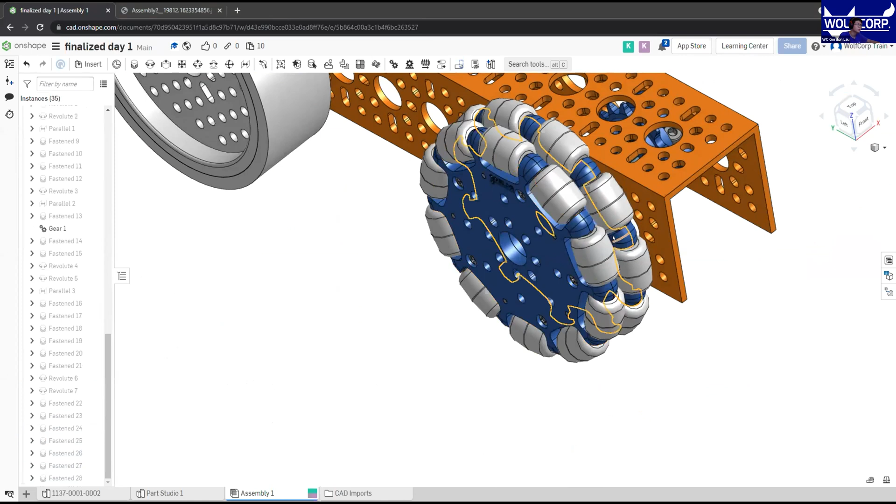I haven't attached the hub for the wheels. So attaching the Sonic hub should be no different, all you do is pretty much you get the hub. Let me go ahead and just back out of here real quick.

So when you attach the hub for the wheels, you simply click on the fasten, go ahead and click the center point. So when we make a fasten connector, when we highlight over the face of our shape or the face of our surface, it should automatically get the circle. If it doesn't, then we can go ahead and highlight and then click the circle. Make sure when you click, you have these small yellow circles saying that you chose that side.

Then when you do that, you can attach it to your bearing. And then as you can see, it's inside of the bearing currently, so we're going to flip it. It's okay, and you should have your hub.

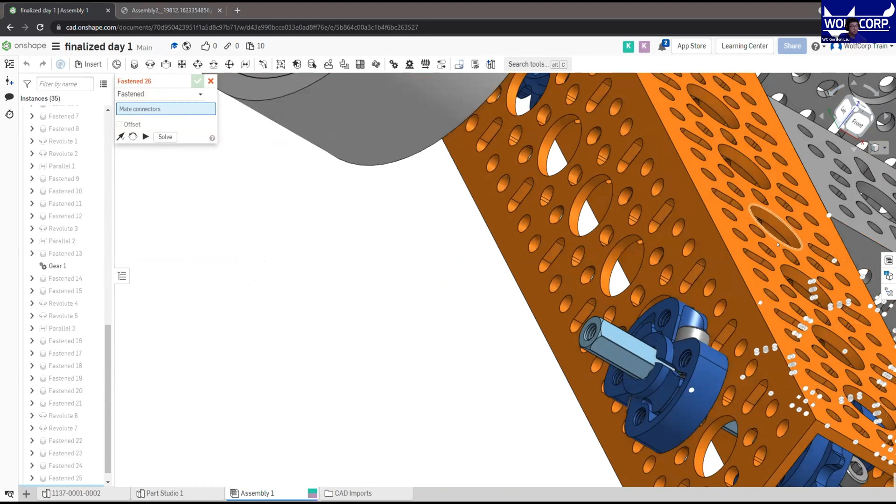I haven't attached the hub for the wheels on the front. On the front. What is on the front? Can you be more specific by what does on the front mean?

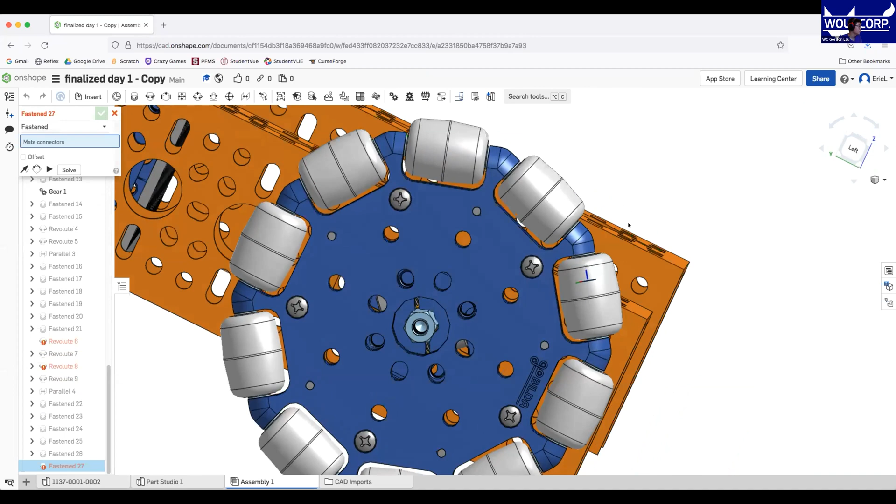Yeah, if you need me to repeat those steps, you can message me and I can share my screen. But if anyone else needs help, they can go ahead and message. What about the other wheel? All right, then I'll just go over it one more time.

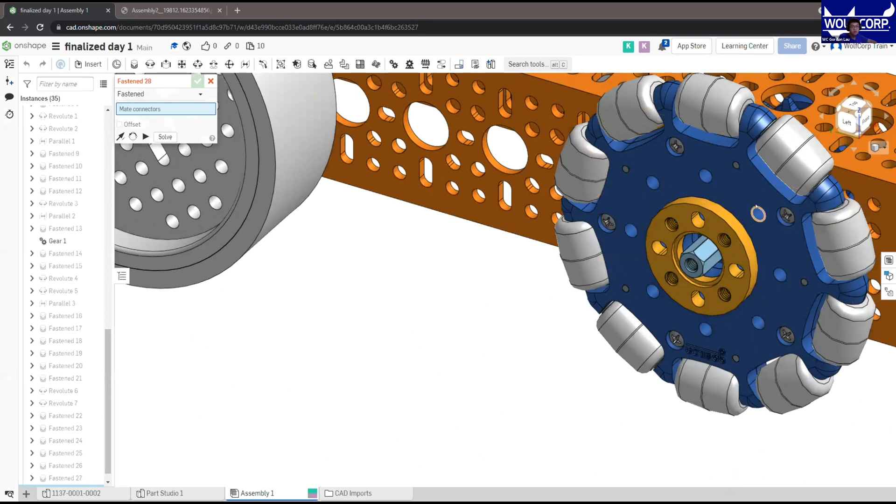So for the other wheel, what we're going to do is we're going to get another fasten, and we're going to fasten this bracket to the wheel. It's like this, we're going to have this kind of circle bracket, or the circle spacer. Then once you have that circle spacer, we're going to fasten this to our spacer, just like that.

But now we have this weird problem going on where the wheels will be touching if you were to use these. So we're going to go to our last fasten, create an offset around the z-axis. It should be the axis that is aligned with your axle. In this case, it's the blue one, so it's Z for me. I'm going to say Z axis and then make a rotation of 90 degrees, and that's how I can get this kind of flip-flop pattern.

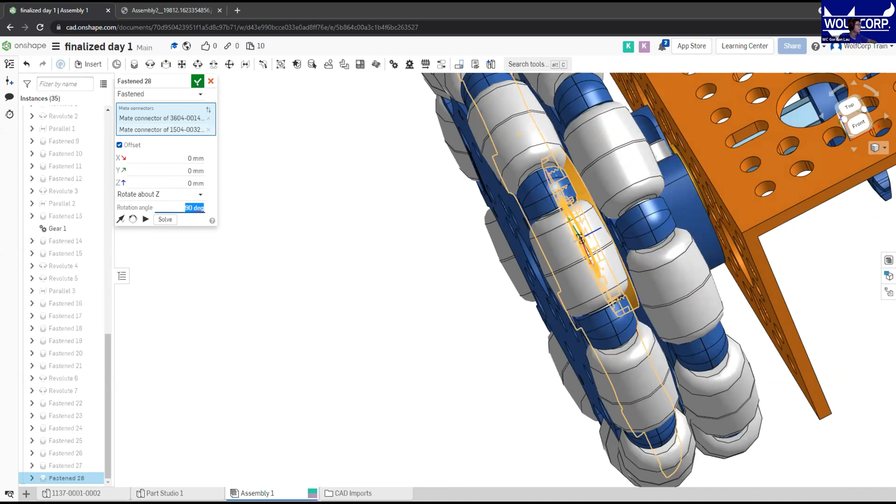Is this the last class? Yes, it is the last class. We will send the file for the finished robot at the end. So if anyone has any more questions, you can go over them, and I think you should be up to date with this wheel.